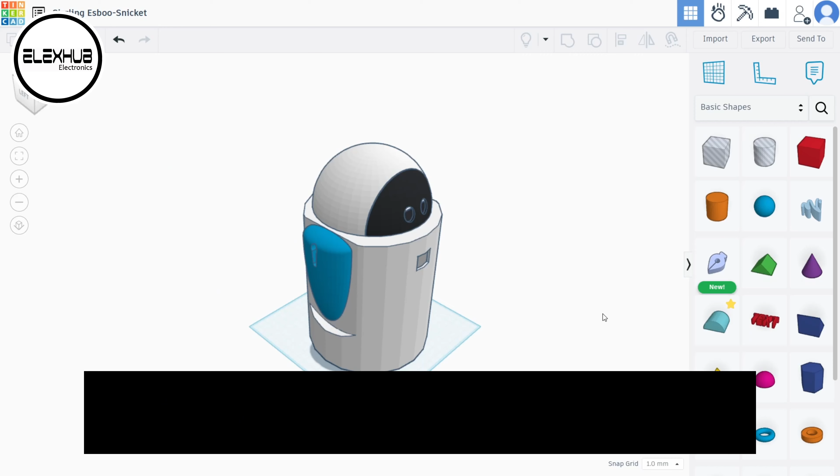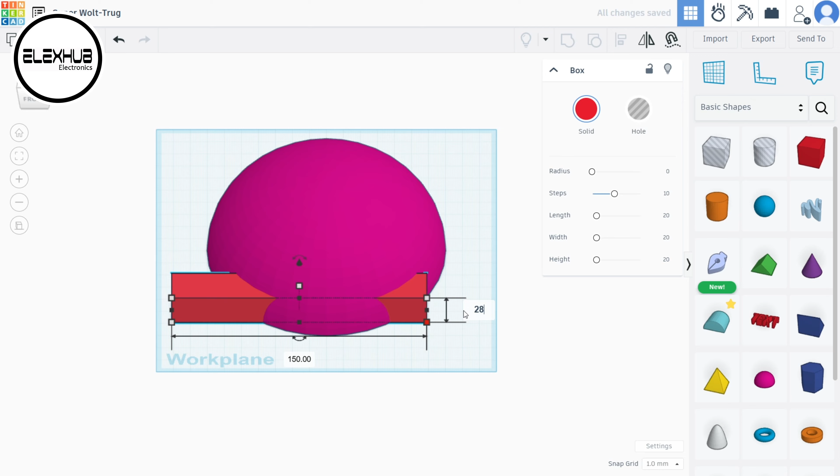3D printed robotics is an exciting field that combines engineering, electronics, programming, 3D modeling, and 3D printing. In this project, we will make a simple 3D printed robot that can move and interact with its environment using an Arduino Uno R3, ultrasonic sensor, servo motors, and OLED display.

We will start with 3D modeling using Tinkercad. To learn the basics in 3D modeling, watch our tutorial on how to use Tinkercad in 3D modeling.

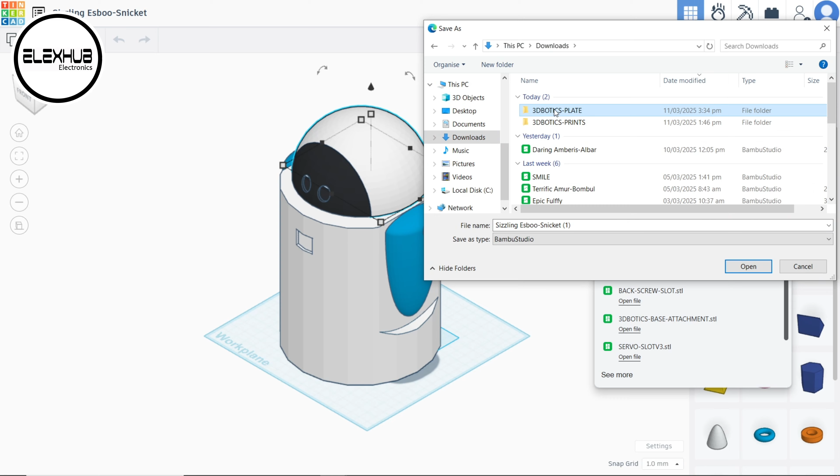After 3D modeling, export each part and print individually. To learn what to adjust in Bambu Studio settings to ensure a successful print and achieve the right balance between print quality, speed, and material efficiency, watch our tutorials on 3D printing.

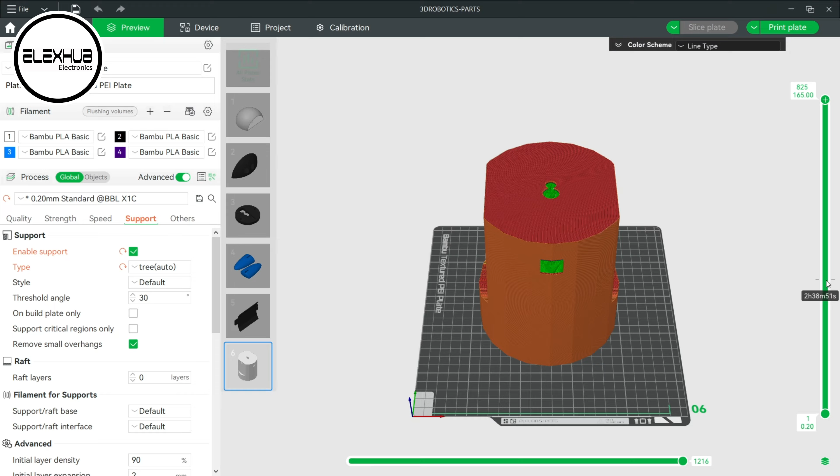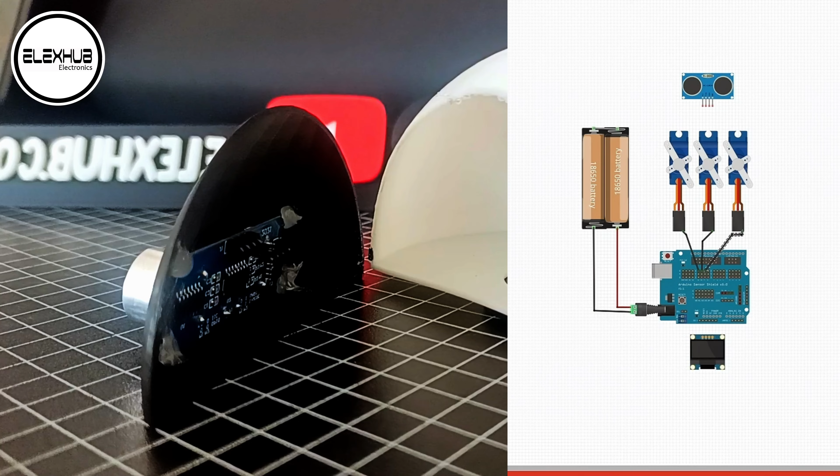From the servo motors to Arduino Uno Sensor Shield version 5, connect the grounds to ground pins, connect the VCC to 5V power supplies, and finally connect the signal pins to digital pins 11, 10, and 9 respectively.

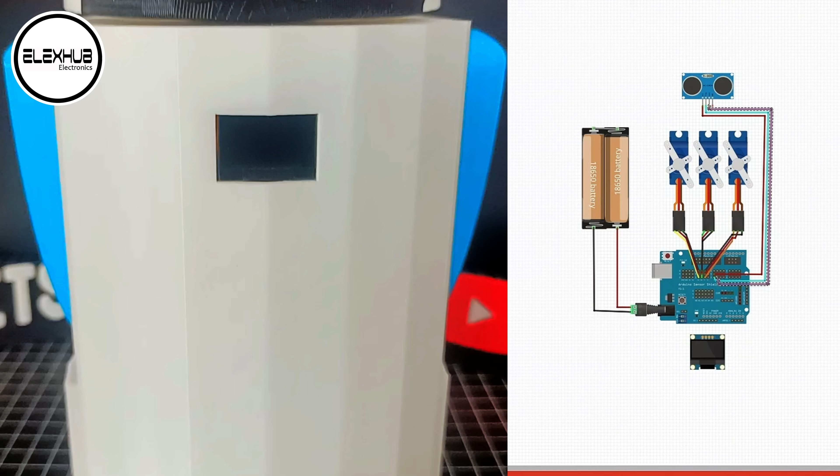To make our robot interactive with its environment, we will use an ultrasonic sensor. From the ultrasonic sensor to Arduino Uno Sensor Shield version 5, connect the VCC to 5V power supply, connect the trigger pin to digital pin 7, connect the echo pin to digital pin 6.

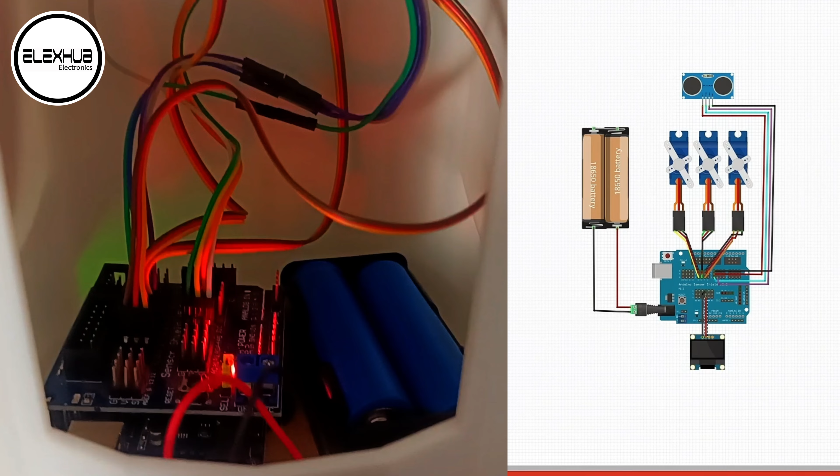And finally connect the ground to ground pin. We will use an OLED display for aesthetic purpose. From the OLED display to Arduino Uno Sensor Shield version 5, connect the ground to ground pin, connect the VCC to 5V power supply, connect the signal clock pin to analog pin 5, and finally connect the signal data pin to analog pin 4.

Let's move on to the sketch for our Arduino Uno R3. Proceeding to the setup function, initiate the serial monitor for debugging and log purposes.

Initiate the OLED display as well. Attach the servo motors and set them to their default position. Let us proceed to the loop function.

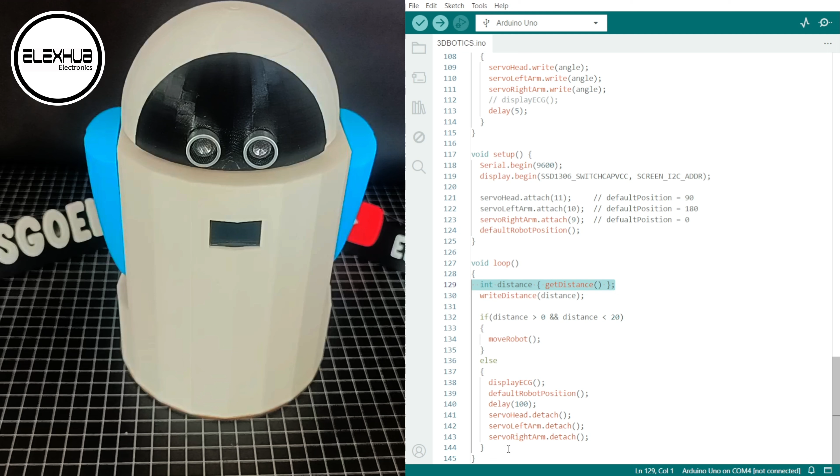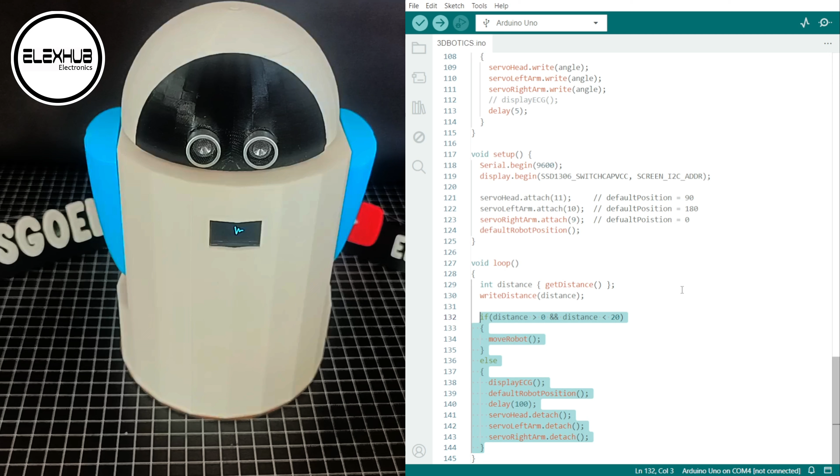Get the distance and check if the detected object is within 20 cm proximity. If the detected object is within 20 cm proximity, the robot will move, else the robot will go back to its default position and continue displaying an animation. Detach the servo motors afterwards to avoid the shaking of the servo motors.